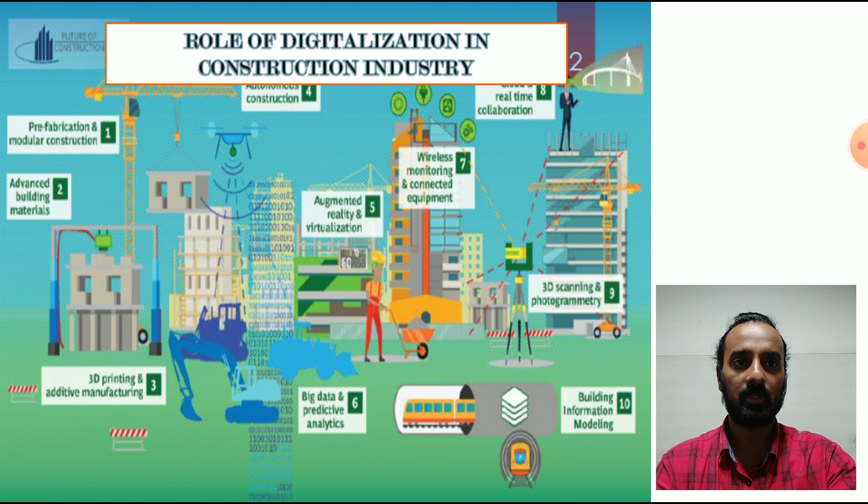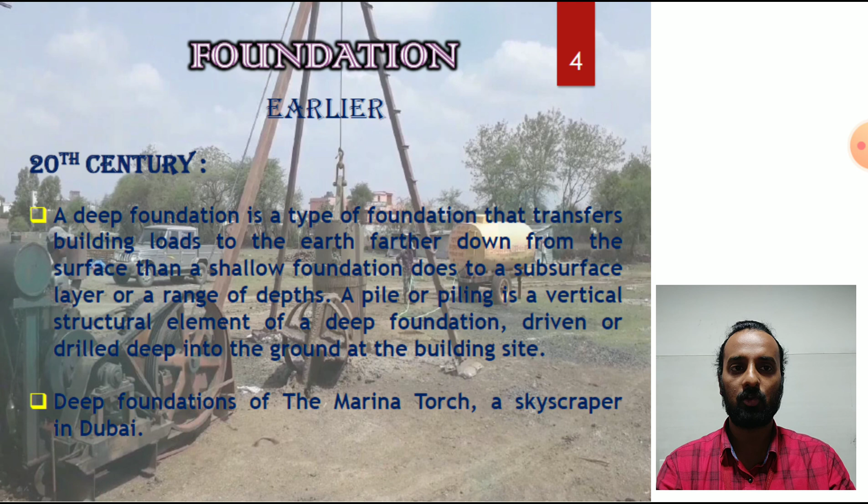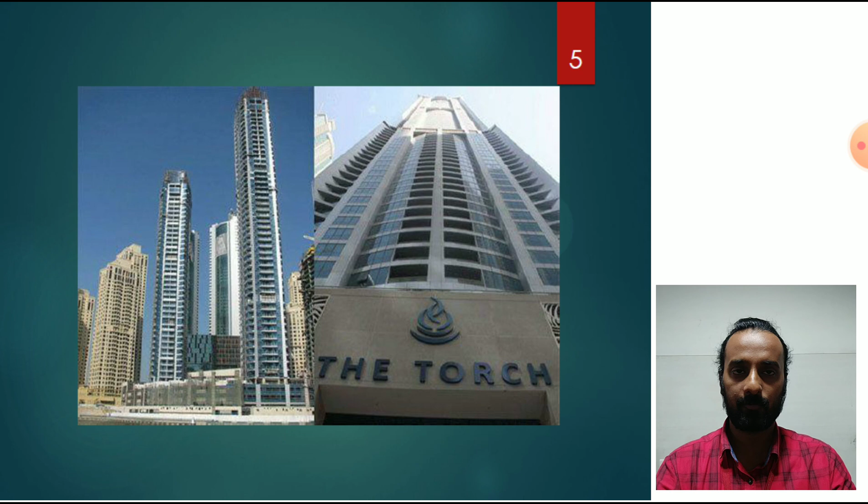For deep foundation, I can give you the example of Marina Torch, a skyscraper in Dubai, which uses pile foundation. In many buildings, it's not only skyscrapers that use pile foundations - for a building with 3 to 4 floors, we can also use pile foundation, depending on the particular type of soil.

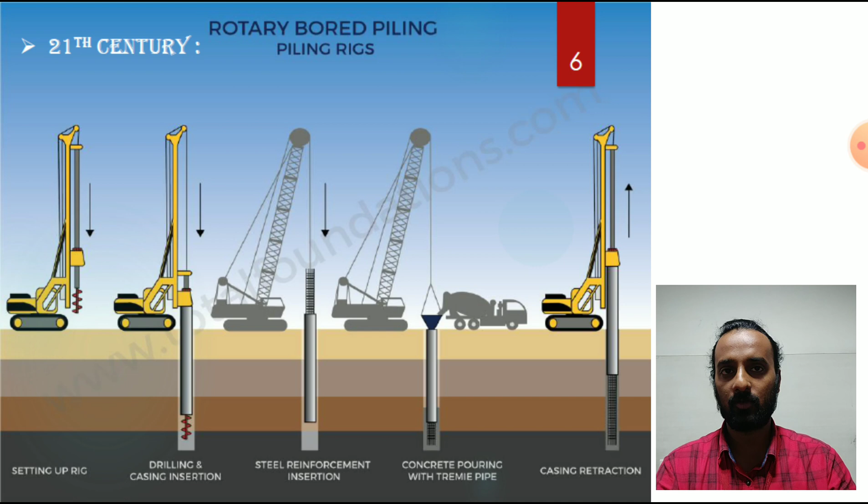In the 21st century, rotary bored piling is driven into rigs. First is setting up of the rig, second is drilling and casing insertion, then they insert the steel reinforcement, after which they pour the concrete with the tremie pipe and casting, and the last step is casing retraction. After that the particular pile is casted. This is the method of boring pile.

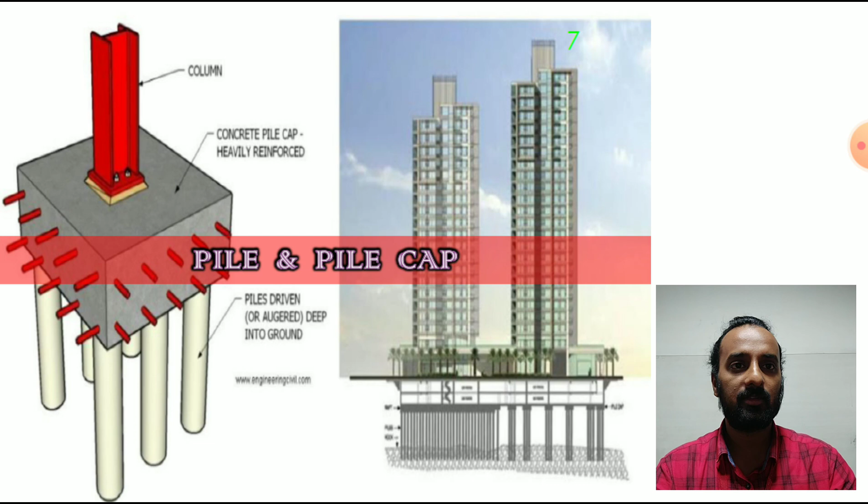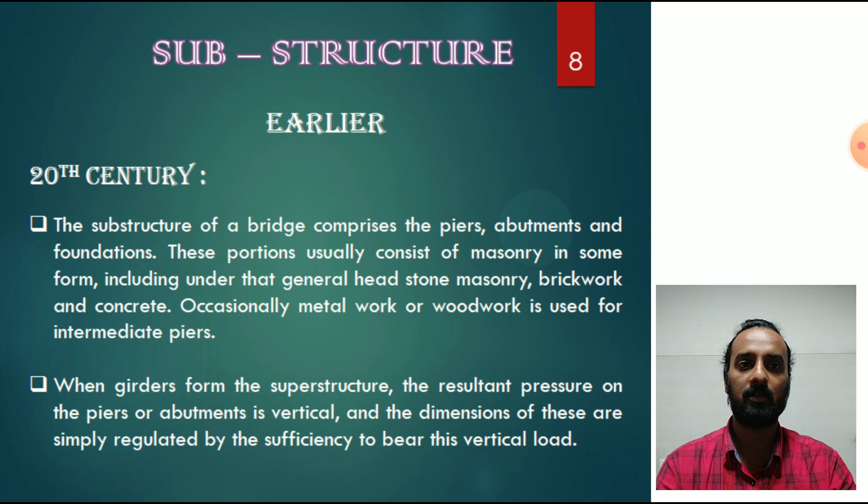When girders form the superstructure, the resultant pressure on the pier or abutments is vertical, and the dimension is regulated by the sufficiency to bear this vertical load. We can see this example: classical formwork method for piers.

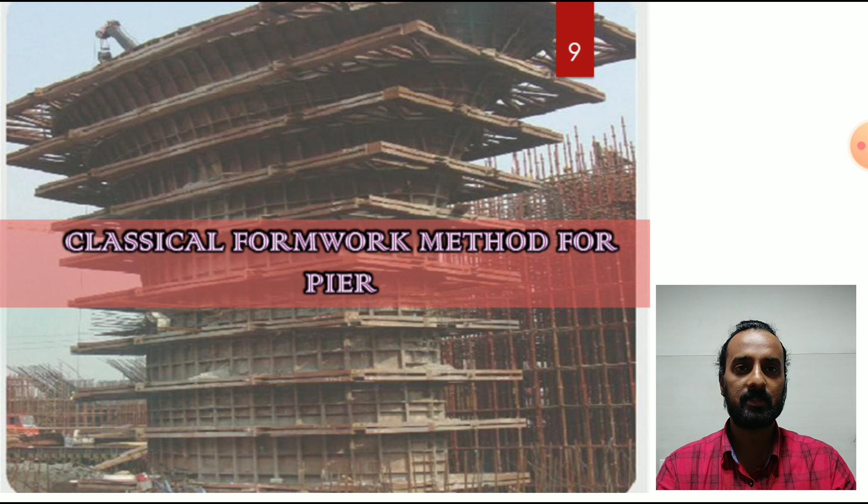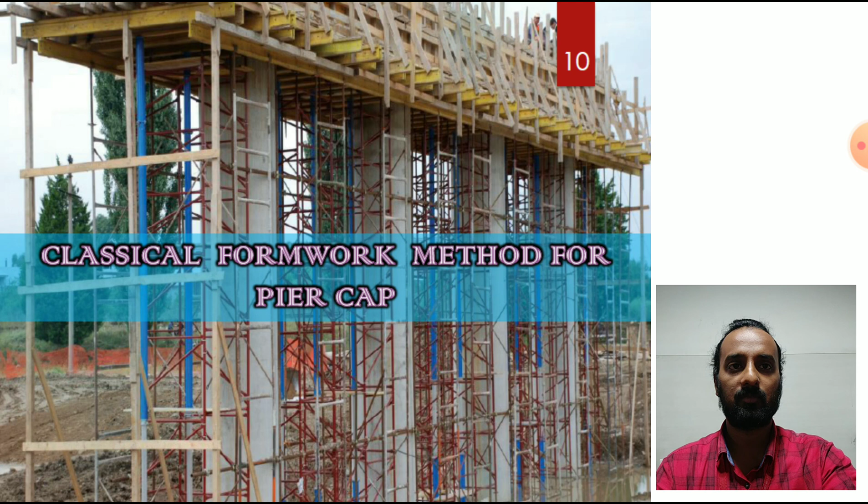Take an example - when we are crossing a bridge, at both end portions there are abutments, and at the middle portions piers are provided for the support of the bridge. So this is the example of abutments and piers very clearly.

In cold climates, the upstream edge of the pier may include a starling to prevent accumulation of broken ice during peak snow melt flows. In colder regions where there is accumulation of snow, the piers actually protect the bridge - they are designed so that as the accumulation of snow moves gradually, the pier breaks the snow part, thus protecting the bridge in colder regions.

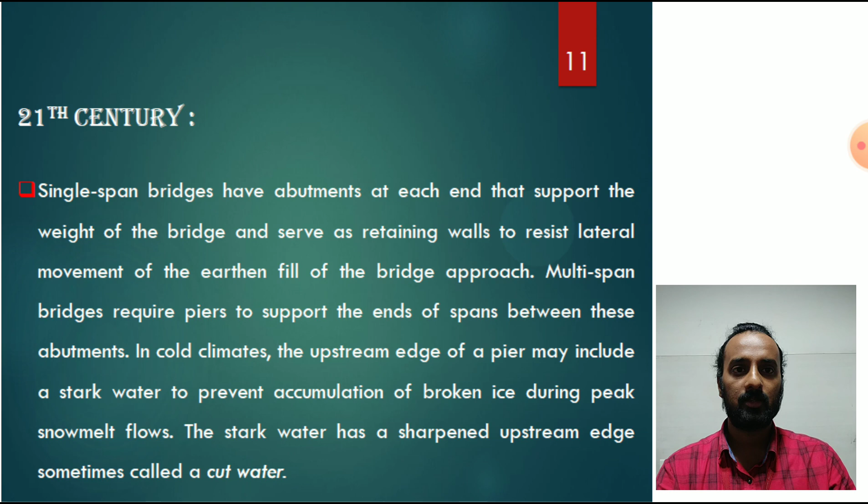The starling has a sharpened upstream edge, sometimes called a cutwater. This is a good example of a segmental pier and pier cap.

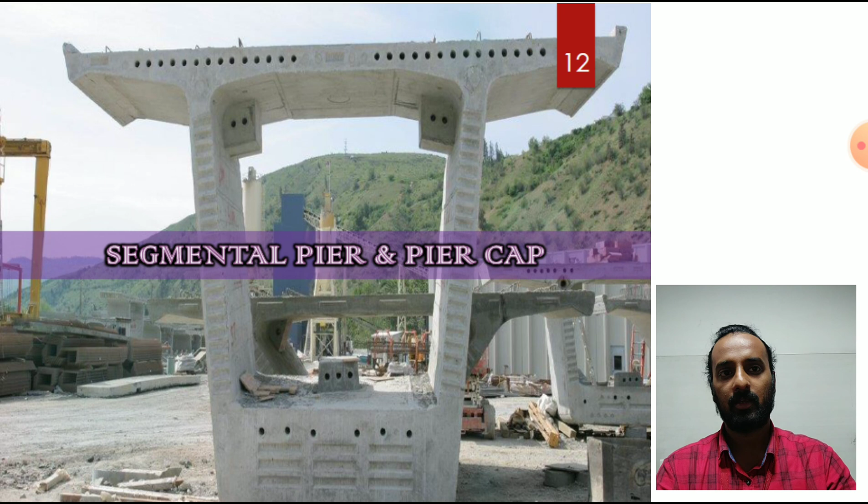Yes, of course, this is prefabricated, and it is already cast in some industries, and it has some formwork, good formwork. Now coming back to superstructure.

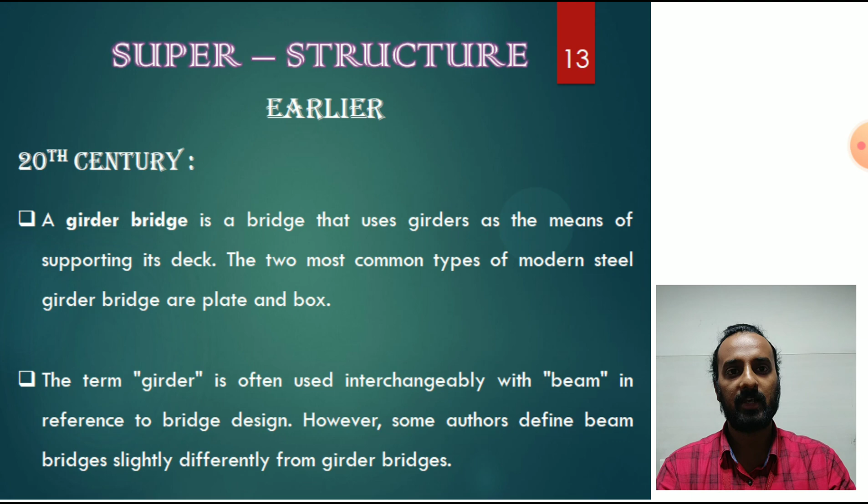The girder bridge is a bridge that uses girders as a means of supporting its deck. Whatever the deck is supported on, it is called a girder. Most common types of modern steel girders are plate and box. The term girder is often used interchangeably with beam in reference to bridge design, however some authors define beam bridges slightly differently from girder bridges.

After the towers are built, a superstructure is built atop the towers. This superstructure serves as a launching point for building the deck. The false work is also known as scaffolding. Scaffolding is usually in the form of bamboo or wood.

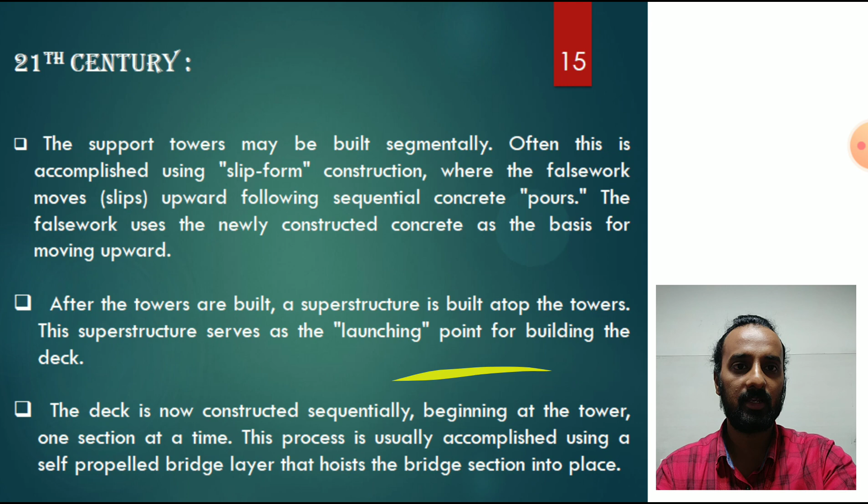The deck is now constructed sequentially, beginning at the tower, one section at a time. These are vertically erected. The process is usually accomplished using a self-propelled bridge layer that hoists the bridge section into place. Again, in cast-in-place bridges, the false work is connected to the previously installed concrete and allowed to cantilever freely.

In precast bridges, the concrete segment is constructed on the ground, transported, and hoisted into the place where the bridge is actually to be constructed. As the new segment is suspended in place by the crane, workers install steel reinforcement that attaches the new segment to the preceding segments.

So when we bring the precast block or precast bridge segment into the installation site, it is placed by the crane, and the workers install that particular block into the particular segment of the bridge. Each segment of the bridge is designed to accept connections from both preceding and succeeding segments.

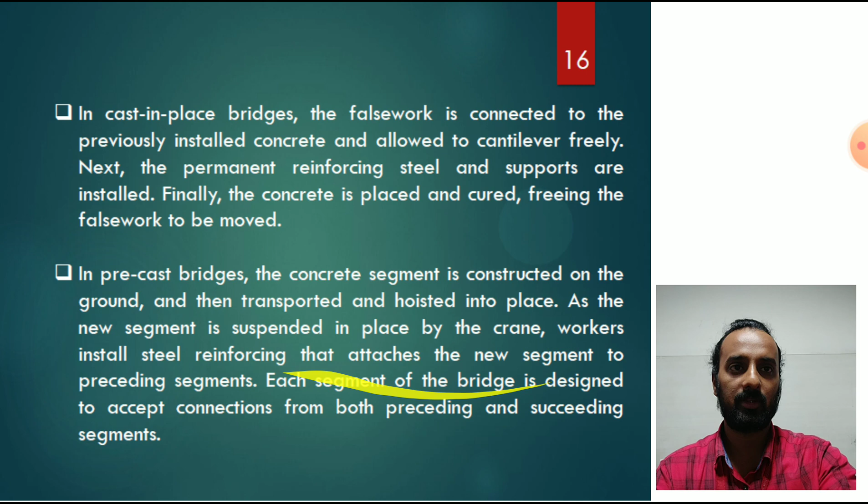So the segments are actually preformed or precast works. They are usually cast in industries, and they are given serial numbers. There are preceding segments and succeeding segments, each given serial numbers, so that they can be placed in order to form any type of bridge or construction.

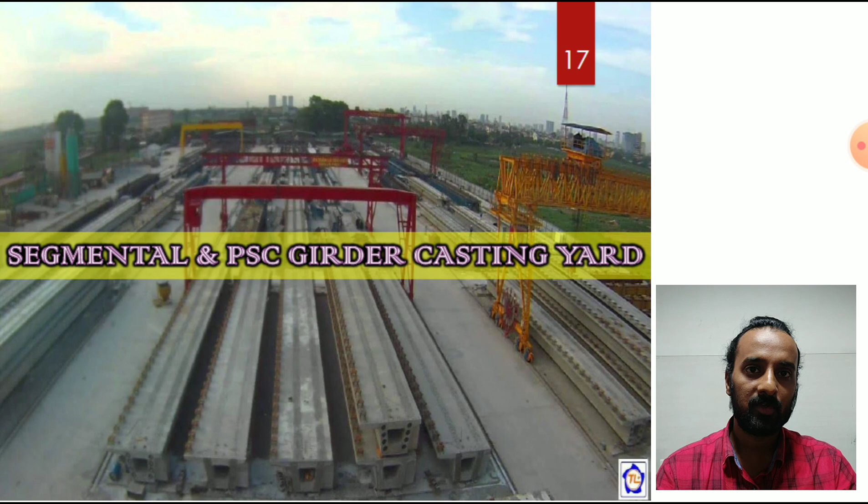Now coming back to 3D printing, as I said, 3D printing also came into the construction industry. This construction printing, called 3D CP, refers to various technologies that use 3D printing as a core method to fabricate buildings and construction components. Many components of the building are also fabricated with various other materials.

I will teach you what materials are used in 3D printing. Alternative terms are also used, such as additive construction. Why additive construction? Because the prefabricated blocks we are using in 3D construction are actually added to the construction. So some components which are complicated to make on site are actually cast or 3D printed.

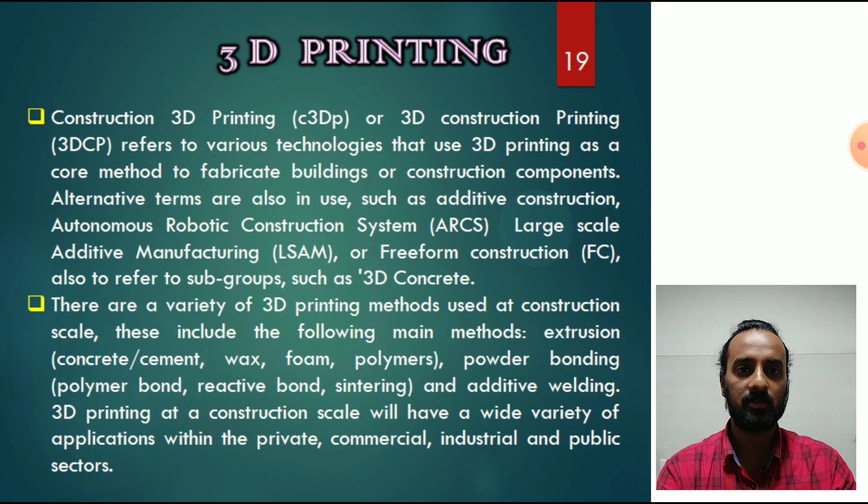Main methods include extrusion, using materials like concrete, cement, wax, foam, polymers, powder bonding, polymer bonding, reactive bonding, sintering, and additive welding. 3D printing at a construction scale will have a wide variety of applications in the private, commercial, industrial, and public sectors. You can see this example of 3D printing.

Now, augmented reality. It is an interactive experience of a real world environment, where objects that reside in the real world are enhanced by computer-generated perceptual information.

What happens is that we cannot visualize the original site or observe the reality directly. So for that, some sensor modalities including visual, auditory, haptic, somatosensory and olfactory are also used.

This augogram is a computer-generated image that is used to create an AR. AR means that you don't have to visit the construction site or bridge or any real world environment. By sitting at your own place or office, you can view what is going to be observed at a particular construction site in its real form.

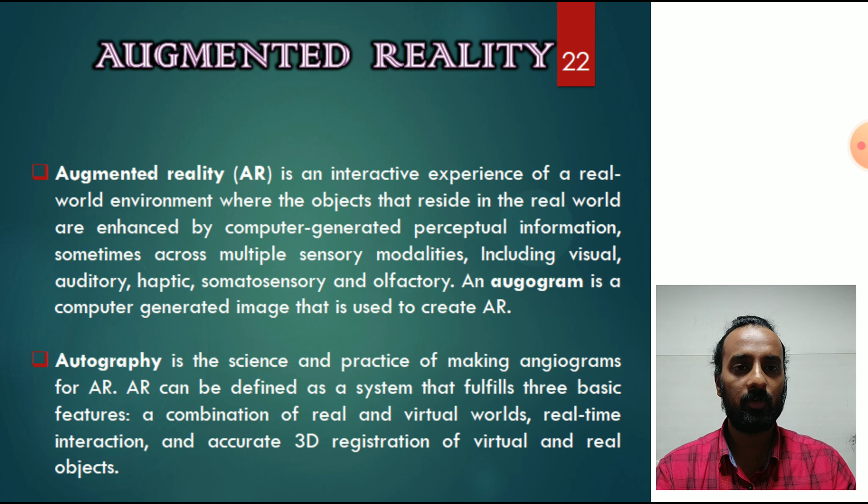Autography or augogram is the science and practice of making augograms for AR. AR can be defined as a system that fulfills three basic features: first, a combination of real and virtual worlds, which combine to form a good image; second, real-time interaction; and third, accurate 3D registration of virtual and real objects.

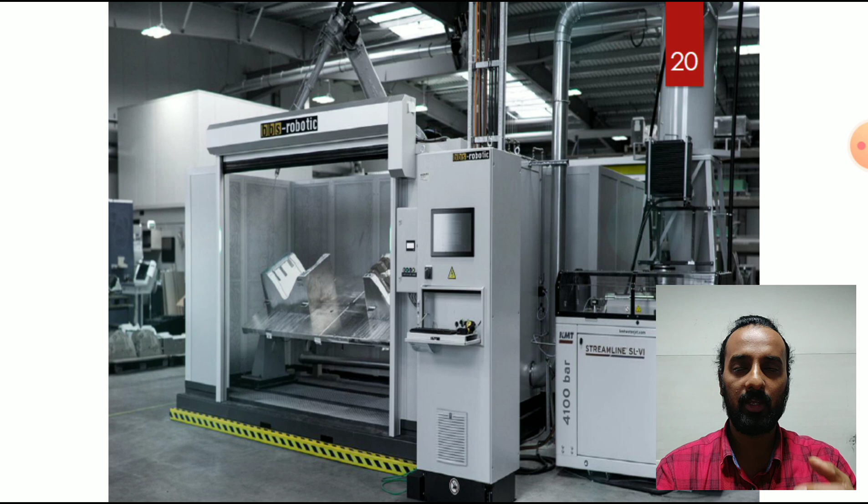Electromagnetic waves are used for topographic mapping. We are actually going for the mapping - observing the ground, how the ground gradients are. The gradient is the up and down of the ground. So how we observe topographic mapping through the photogrammetric method is like observing the ground in a photographic way, from a graphical point of view. I will show you examples.

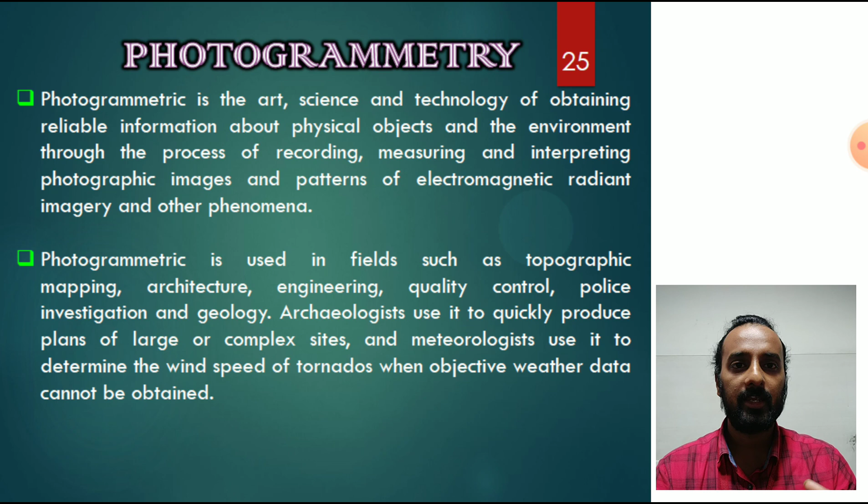Meteorologists use it to determine the wind speed of tornadoes when objective weather data cannot be obtained. Flying height is another example of a photogrammetric measurement - it measures the altitude and height of the ground object. You can see this example.

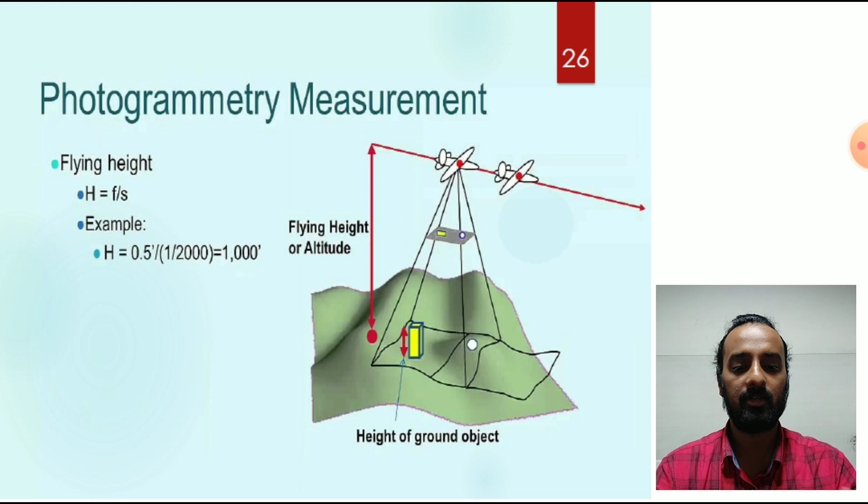After observing photogrammetry in real scale, measuring with this instrument, we have one good example of a photogrammetric measurement: LIDAR, light detection and ranging. We will discuss this in the next lecture. But after LIDAR, the thing is not completed. LIDAR observes the ground reality, height and width of the grounds, buildings and industries, everything. But we have to process that information in some software - that is called photogrammetric measurement.

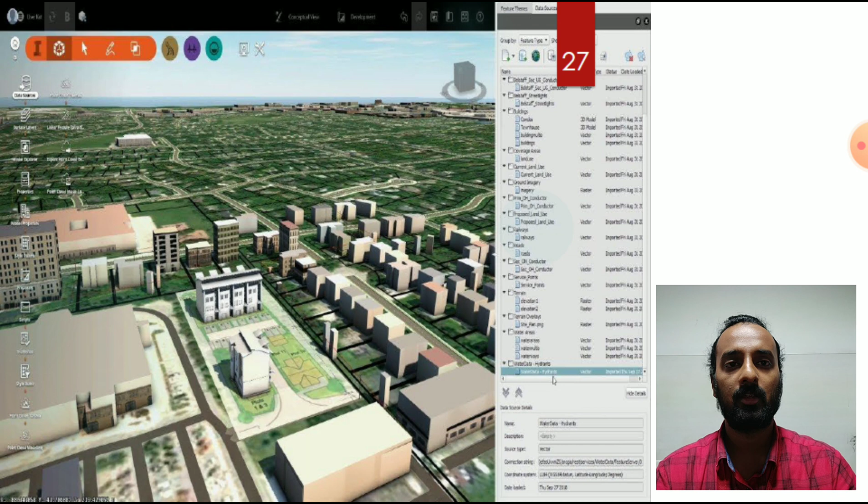Here we can also see the building site, building ground level and construction level, and after that we can plan some kind of building or any type of structure, transportation structures or anything, by using this example and this virtual example.

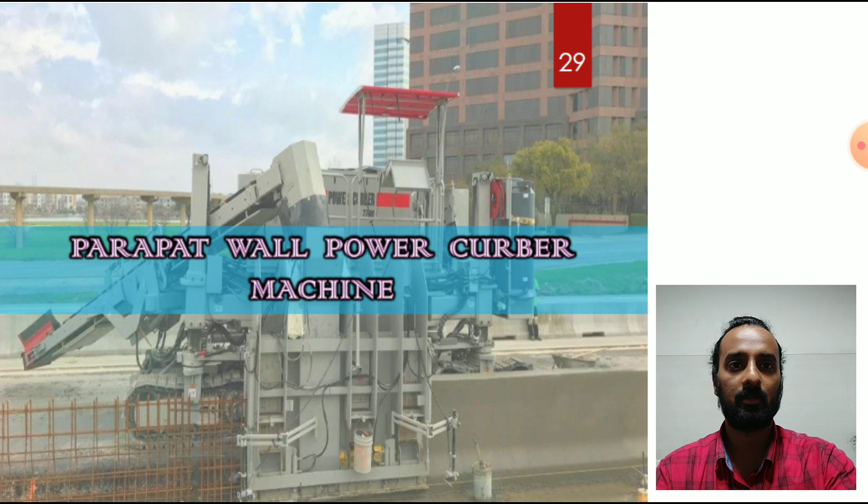Recent technologies in construction industries - we are moving towards recent technologies like machinery for a parapet wall, a power curber machine for building a parapet wall in between. It is also used for curbs. This direct casting machinery can also be used in curbs for road construction.

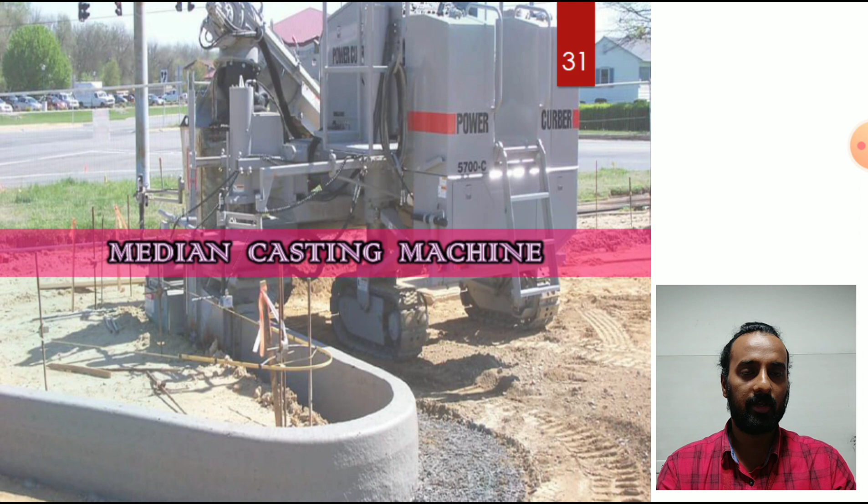Median casting machine is generally used in roundabouts, intersections, and places where a median is used. Median is what we can say in general terms is a divider, but that's not the correct term - never say divider. It is a median in between the road; the median divides the road into two parts in different lanes. That's why it's called a median. The actual technical term is median, though in social terms people call it a divider, which is wrong. For casting the median, this machine, the Power Curber, is used.

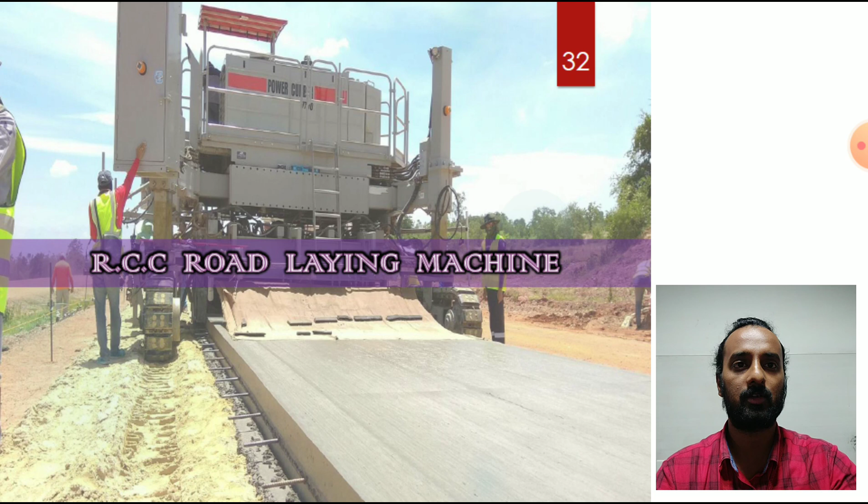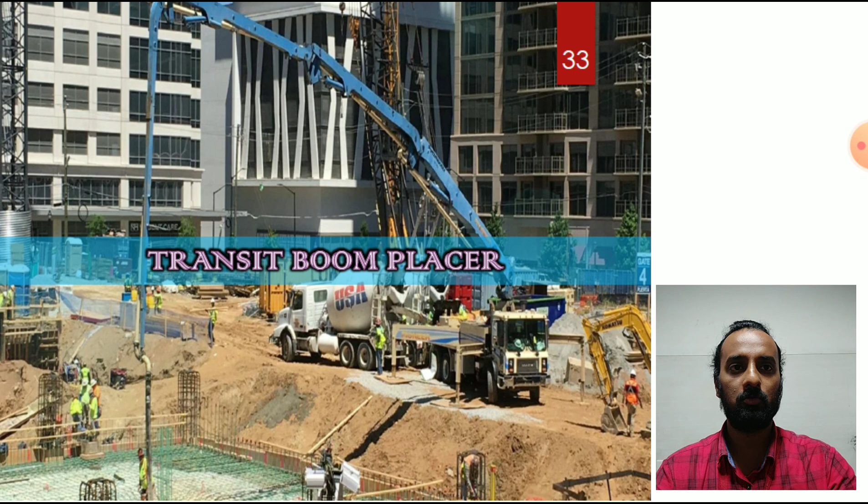Again, the RCC road laying machine is used for construction of an RCC road, reinforced concrete road. Next is the transit boom placer - this can approximately place concrete from ground level up to 60 meters height and more, so it has a very good capacity. It is also hassle-free to transport concrete of any cubic meter amount from ground level to any upper level.